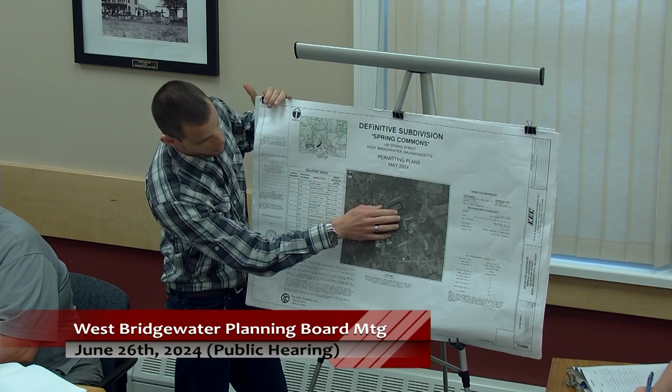This is our preliminary lotting plan that we have come up with. Before, the wetlands was more of a finger type shape; it has expanded a little bit on either side. And per direction from the conservation agent, we're proposing all work outside the 50-foot buffer. By doing that, we are requiring the road to be shifted, almost an S shape, to go around it with the cul-de-sac at the eastern end of the site, similar to the 6-lot layout back in, I believe, 2015. We have a drainage parcel as you enter into the site on the left, and all the lots to the back, with a common septic system area at the front of the site along Spring Street, because that was the only area that was perkable.

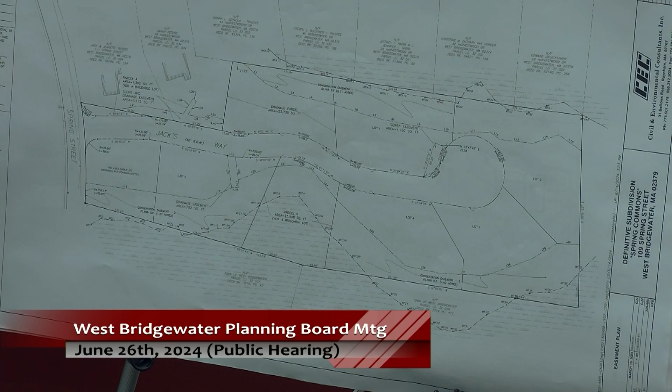Here we have an easement plan, kind of going in tandem with what was done from the previous engineer that conservation is really liking. We're providing a conservation easement. Essentially, it follows the 50-foot buffer line, and this essentially becomes a no-touch area. And so we're going to be working with a wetland scientist to come up with a buffer mitigation restoration plan for this area.

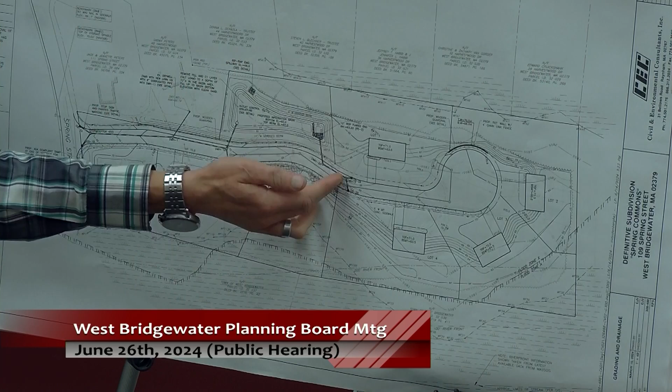And here's our proposed grading and drainage plan. So you come into the site, you have the common septic area to the right, stormwater infiltration basin up to the left, and a cul-de-sac at the end with 5 lots encompassing the entire project. Stormwater generally flows from the cul-de-sac to a low point about halfway down to the road. There's a high point as you go up from Spring Street, which then comes back down to a set of catch basins that flow into the stormwater infiltration basin.

Here's our grading sheet. Typically, the site is going to slope up from Spring Street about, I think it's about 150, 175 feet in, then slope back down to a low spot. There's, like I said, a set of catch basins that will allow stormwater to flow into the infiltration basin. The high point in the middle of the site flows to a set of catch basins at the entrance. So no stormwater flows are flowing into Spring Street uncontrolled. It's all being captured via a set of catch basins at the entrance, then essentially flowing backwards and then off into the wetlands that are on site and then off site to the south.

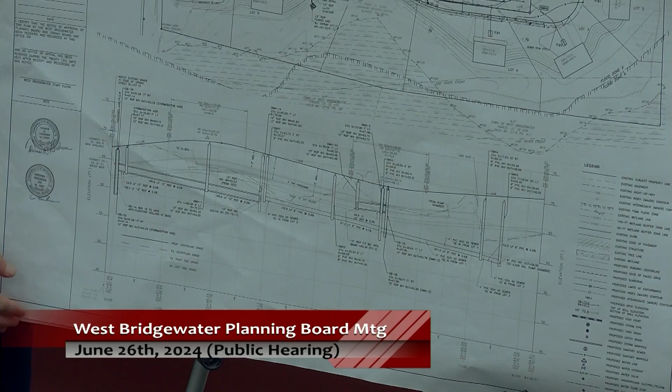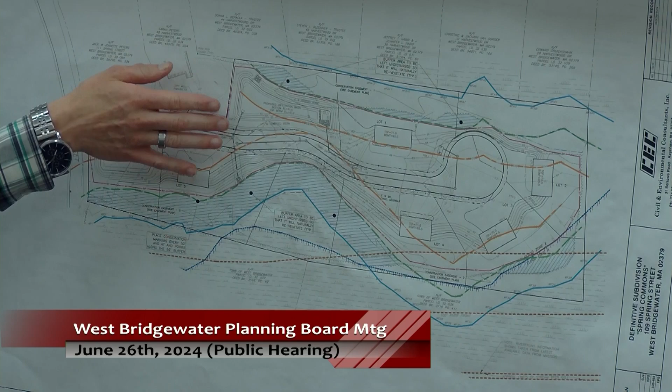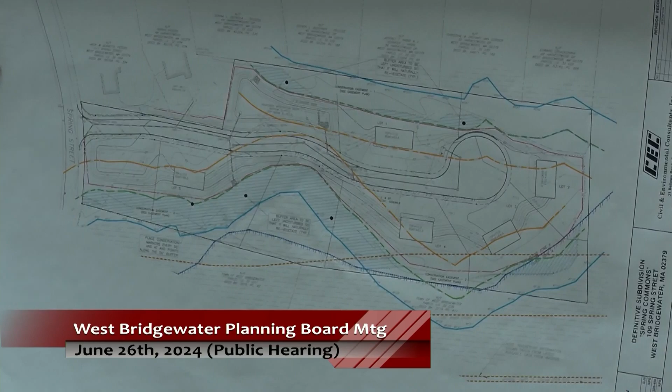And this was a plan that was essentially prepared for the conservation hearing, but it kind of shows the layout of where we're proposing the silt fence, the areas of the 100-foot buffer, and the areas of the 50-foot no-touch. So right now, with this proposed project, no work is being proposed within the 50-foot no-touch. Conservation has asked us to look into restoration mitigation measures within the 50-foot no-touch, and that's currently what we're doing right now, coming up with a plan for that. The rest are just standard details that we have. That is the project in a nutshell. Over to the board if you have any questions.

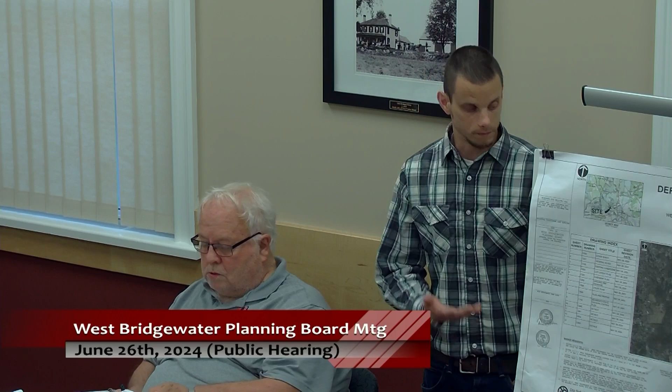Our review engineer came up with comments. Have you addressed all of it? No, we are in the process of reviewing and addressing those. We reviewed it, and it doesn't materially change. I think what they reviewed was still a 5 lot, but it showed work within the 50-foot no-touch. Based on comments from conservation, they wanted us to work outside the 50-foot, so we ended up making modifications. Okay. So we're in the process of working both angles, working with conservation and working with these peer review comments. And the point of tonight was, we're addressing those and then getting comments and questions from the board.

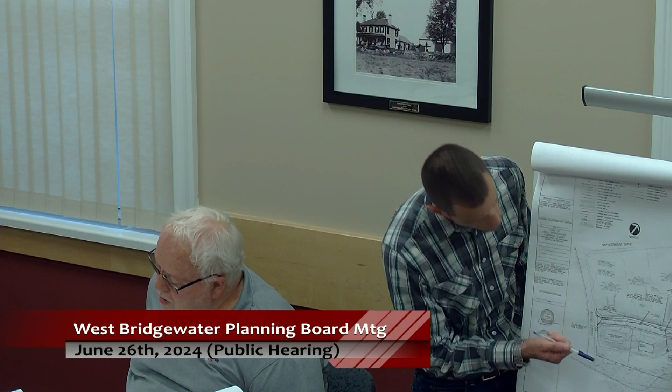Okay. The reason I ask is I haven't seen anything back. Yeah, that was the anticipation, I just wanted to bring it on. I know there were some issues. One of the things we were concerned about last time was around, I think it's Station 4, where you've got the 2-to-1 slope. Have you come up with anything? Yeah, I saw one of the comments was providing a guardrail, and as a matter of fact, I saw that even before I saw the comments, like, oh, that's kind of a steep slope, I'm gonna throw a guardrail there. I read through all the comments, they didn't seem to be materially changing with this new layout. So I am actually showing a guardrail along that 2-to-1 slope there. Where are the hydrants? I think it's on 600 feet.

I'm not that sure. There's one right in front of lot 5. Yeah, okay. I think there was, yeah, only 2 of them. It's under 500. Yeah, it's under 500, I did see that earlier. Did you put one at the end? Yeah, there is, it's so small, very hard to see. But there should be one right in front of, I think it shows test pit 3, between lot 4 and lot 3.

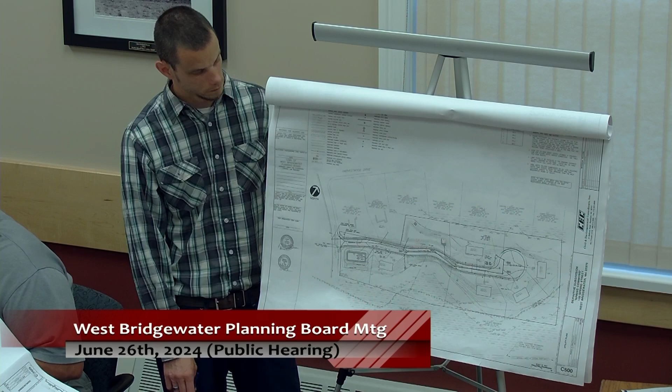Because it shows a little circle, but yeah, it's definitely within 500 feet. That's one thing I absolutely looked into. You put the hydrant right in the front of the house on lot number 5. Yep. That's something that can be certainly moved. I think the spacing right now is like 480 feet, so everything will be moved in tandem.

Nobody wants a hydrant or a telephone pole when they look out, you know. That's very true. Yeah, something that can certainly move. It should be moved to the lot line. Yeah, they should be on the lot line. And I don't see one down at the end.

It looks like you've got a bleeder coming off near the lot line of 4 and 3, kind of zigzagging across to a service. If you look just south of SMH4, there's a little dot that represents the hydrant. That's such a small scale, it's hard to see. But is that line just a service to get to lot 2? Are you looking at the one next to the text that says TP3?

Yeah, that's the service. Okay. Where are the hydrants? What is this? Oh, that's a water service coming to serve this lot. It's going to cut across the street like that? Yeah. Right now it's just dead in the water. Dead. Okay, but that's the same thing.

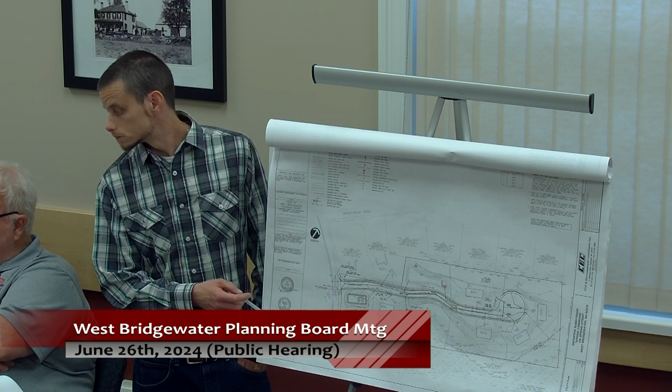You should locate the house and driveway. I'm not sure just where it is over there, but just to show it. I think it's further up. Is the house further up? Yeah, it's more up, opposite the end of Harvestwood. Okay. So south of it, it's just woods there, okay.

Go ahead. I walked that sidewalk for 6 years, I know it. All of high school. Uphill both ways. Yeah, me too.

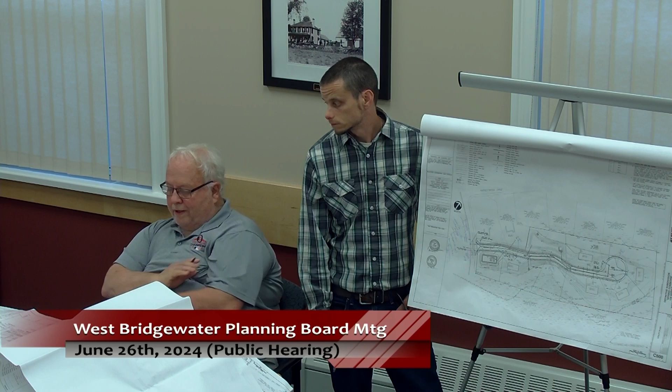Maybe you can work that in. You said you had a wetland scientist looking at the plantings. Yep. Maybe you could incorporate something. And it'll be plantings that aren't gonna take 25 years to grow, something that's gonna be put up and exist. Yeah, that will keep the top through. Yes.

This was on the 88 vertical datum. I believe NAVD. Yeah, well, I saw one of the waivers with 29 to 88, which I think last time around we said, yeah, that makes sense, because the FEMA flood mapping is on 88. Yep. Is there a FEMA elevation for the 100-year floodplain? Or is that just taken from their maps? The only reason I'm asking is because it goes over several different contours, and the 100-year floodplain would be consistent with some elevation. Yeah, it's just listed as Zone A. I don't think it has an elevation associated with it last I checked. I believe it did. Yeah.

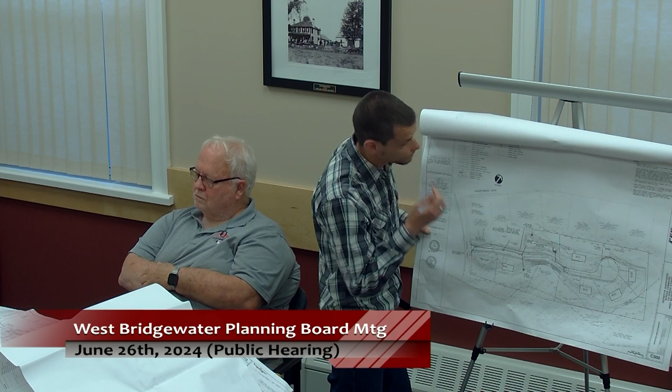Yeah, so you're right here. Okay, so I have a lot of wetland back there, and this past winter, it went straight into his property, pretty far back. I took pictures of it. Yep. And my concern is that with the wetland behind my house, it's gonna rise that much more, and the water table will come up that much more from my house.

So, I mean, the way it's been designed, that's the whole point of the infiltration basin, for stormwater mitigation. We have a stormwater report that shows stormwater flowing to this wetland area, and stormwater flowing to this wetland area. As part of the stormwater management standards for Massachusetts, you have X amount of rate or volume going to this pocket of wetland, and that was analyzed.

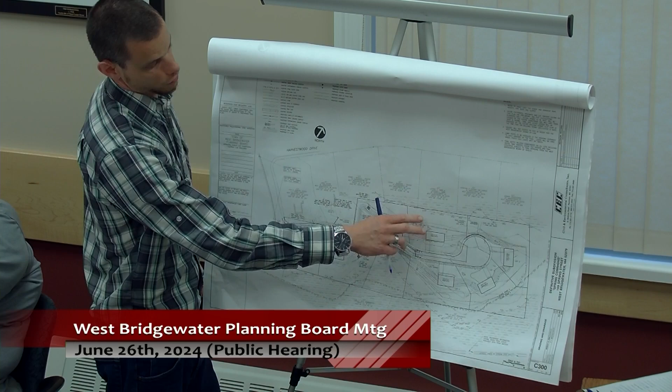So with this layout, with the grading we have shown, and the assumptions that we made, there is less runoff going to this area of wetland and this area of wetland, and that's what our stormwater report shows. In theory, it's not going to change the water table. It says that there's going to be less runoff from this development going to these two areas of wetlands, and these are our design plans, and that's what it shows. But we don't look at what it does to the groundwater table. I can't speak to that.

Well, and that's my big concern, is the groundwater table will go up. And that could affect my basement, because that house is built right behind my house. And like I said, that water has gone directly into his property. And where the rocks are behind my house and his property, they came right up to there. So that's just a real concern of mine.

Did you bring that up at the conservation hearing? We didn't go. It was brought up, but they were deferring to wait to hear back from you. So, yeah. Kicking the can down the road, okay. But

that's one of the reasons we have a consulting engineer review all of this, and he'll be made aware of it and look into it. In fact, the same engineer reviews it for the Conservation Commission too, and it has worked out very well. He's a very qualified engineer, and he doesn't do any work in town. All he does is review stuff, so there's never a conflict of interest. But this will be brought to his attention, and we'll have him review it too.

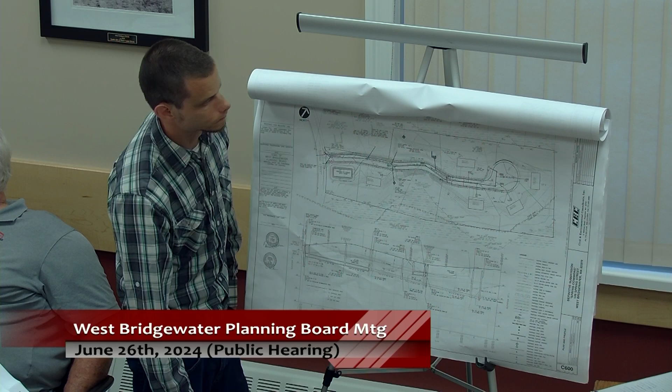Yeah, I can tell you, this was certainly wet when we went out there. It's wet right now. You can come to my house. I bet it is. No, it's gonna be a pool in 3 hours.

So, Christine Gorman, I live at 32 Harvestwood Drive. Yep, you know exactly who I am. So a couple of questions. One, was the stormwater report redone for the new configuration? Yep. Okay, can you publish that, because that was not made available to any of us? Yep, and that's what we're working with as part of this round.

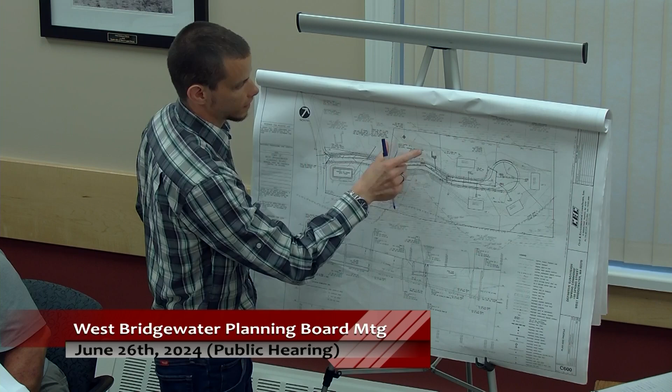So the point of tonight's meeting was to essentially show the board that the older plan essentially worked, and to recreate that same plan here. Instead of the low spot there, where stormwater was going to flow, now it's going to flow to this low spot. It's the same size as the previous design. Correct. And as you were saying, providing you that stormwater report, yes, made public as the next round of revisions comes about.

So I assume that the soil configuration for both that new infiltration area and that back lot are not exactly the same. No, and that's one thing that we looked into, if you have better material here or there. We absolutely looked into where the groundwater table was, and adjusted our design based on that.

And obviously the big thing was this was easier to outlet, because clearly you're going to outlet here. Luckily it worked out where there is no outletting to Harvestwood here. It's outletting to the adjacent wetland, which is more offset where there are fewer abutters. So that was the key thing that I wanted to look into. But yes, that can be done.

However, naturally, by the topography of your plans, it will inlet into the brook that's there on the wetlands, on our side. It might be connected. On the Harvestwood side? On this side here? Yeah, because the topography of that new infiltration field slopes down. So by the very nature of the way water runs, it will run down towards the wetlands. So the way this is, I think it's kind of like a big depression here.

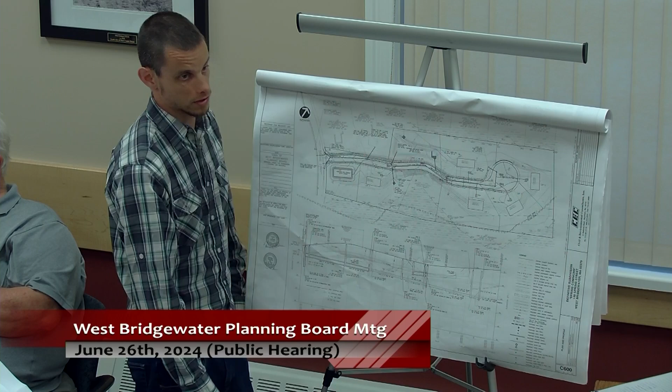But that berm doesn't currently exist, does it? No. So you're going to build that berm, so naturally the water is going to flow back into the wetland behind our house. Yes. Correct. Which will raise it much greater. But according to the water regulations that are controlled by conservation, he's not going to be able to do that. Conservation has not taken a deep enough look into where the water now is going. And you need to jump on top of them, because they took that away from us about 3 years ago. Oh, I do. Don't you worry.

Our basic control is how the water on the impervious, where it is on the surface and where it goes from the surface. Anything on the lots and anything like that is controlled by conservation. So you need to get on their case, because we used to have a say into it. I mean, we can make recommendations, but they are the ones that can say yes or no. But you're not supposed to control water. You're not supposed to create any more hazard on the abutter's property. Is the simple solution. So he's got to make that water that's coming from your direction go south.

Chris, on that infiltration basin we're talking about, you've got an outlet structure, and you say outlet control structure, see detail, and you don't have an invert elevation on it. What is it, where is the detail and what is the elevation? Let's see. That should be on C800. Should that be revised? Should have revised that. Yeah. Okay. Yep, so C800. Okay. And which one is it? Should be down to the right.

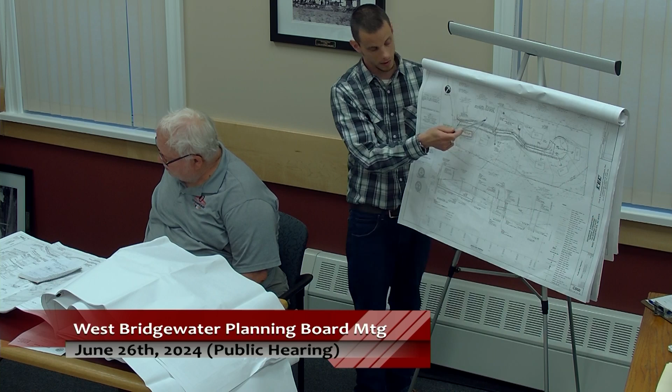So if that's 64 and the overflow is at 66, before that infiltration basin fills up and tops it and goes over towards Harvestwood, will it start coming across and going to the southerly side? We talked about, yeah, so this is the primary outlet. This is just an emergency overflow. The way this is modeled in a HydroCAD model, this is the primary outlet with the outlet at elevation 64. I think the peak elevation in the 100-year storm was 65.9, I believe. So it never in the 100-year storm gets to actual elevation 66.

The emergency spillway was put there in case there's a failure at the outlet control structure. That would have somewhere to go. And there is no opportunity for it to go into or towards the roadway, because the roadway is built up in that area. That's why I have the emergency spillway on the opposite side. So going into the structure, it'd be at elevation 65, right? Yeah, that's where water starts entering in, and then on the back side, it's actually exiting the structure at elevation 64. And when you're modeling it, you've demonstrated that this is all in there, because I know it's about that thick, I haven't looked through it. Yeah. It is all modeled in there. Okay.

There was some concern in engineering about the retaining wall that'll be at the end of the cul-de-sac on lot 2. Yeah, we're working with the structural engineer for that design. Okay, so that's still in progress. Yep. And as we were talking earlier about the guardrails, that'll have to be incorporated. Yep.

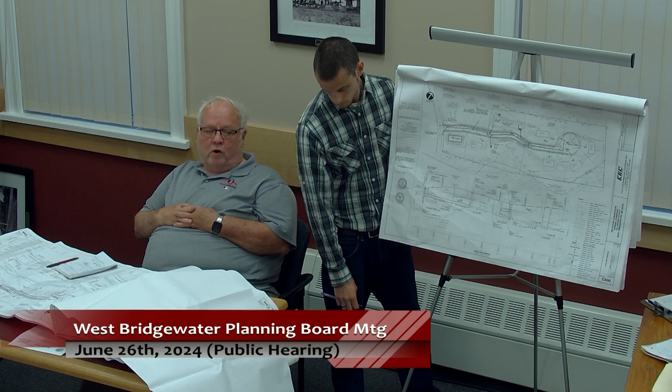And until the street is accepted, it won't be plowed by the town anyway, so it'll be a private contractor paid for either by the developer or the homeowners association. And who is gonna inspect if it's plowed correctly or everything is done correctly? The DPW director. Well, no, you mean if it's a private road? Right.

That's one of the reasons we don't like seeing this, because if it's a homeowners association and you're not taking care of it, all of a sudden you got 6 houses here, 5 of them are going to call up and say that the other one isn't doing what he should be doing. That's why, if you're going to have a house, you want to be the same as every other homeowner. You want to have all the rights of every other homeowner.

That's one of the reasons we advocate accepting the roads, because then the town can take care of it, and they can make it work, and they will take care of it. As you can tell, they do a very good job in West Bridgewater. You go to some of the other towns and you know the difference. No, I agree. They do a wonderful job.

Even though one of them is sitting there, I'm not playing their hand, but he does not do a good job. Listen, you're not talking about me. There's an exception. There is an exception to every rule.

I have a question for you guys, though. Why wasn't Conservation invited to this meeting? I mean, you could see our concern about this and how important it is to Harvestwood. Okay. There are different things. We have a certain amount of authority. Basically, the planning board is to ensure that there is adequate access for vehicles and walking and utilities.

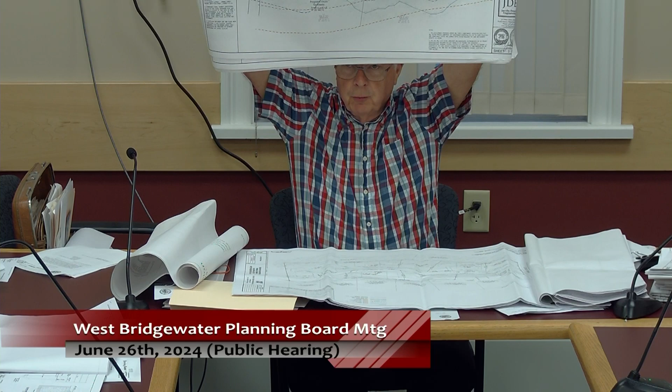There it is right there. This is what was approved. So are any of those concerns relevant? What was the concern from 6 to 3? I believe conservation also approved 6. There was an order of conditions that was issued. Yeah, but this is what was approved. Here's the signatures right on it. This was done in 2018, 6 years ago. But this never went forth.

That's the 3-lot plan? That's the 3-lot subdivision. And that was approved by both the planning and the conservation? Yes, I believe they did approve it also. But my understanding, the plans that were in at that time, we weren't comfortable with, and it came down to this. Different engineers have worked on it, and after we expressed our concerns, this is what he came up with, and we approved it. Basically, it was never accepted.

Was there a community septic on that? I don't believe so. Or was that individual? I would think it was. Yeah, still the community septic was in the same spot. Okay. I don't know why we went down to 3. It was something that couldn't work. I heard it was the applicant's thing. Why reinvent the wheel? Why would I propose 5 or 6 when you guys approved it? So maybe marketability of those lots.

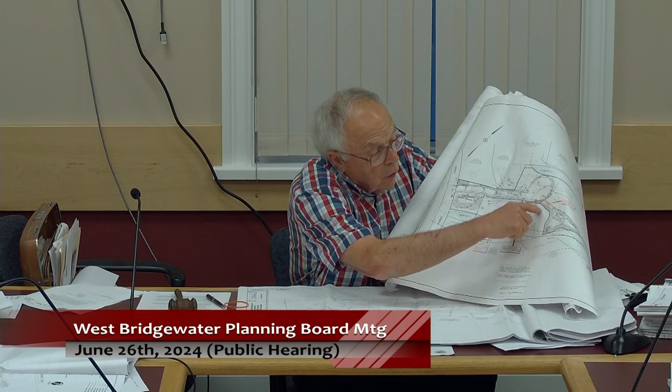And what causes that to grow? Will it get bigger? It's called beaver. The beavers behind Bobby's house have plugged up the swamp. But to be fair, the wetlands grew on the Harvestwood side as well, because we had it delineated, everything backing up from going under the road on North Main Street. So an influx of water can always fluctuate the wetlands, which is why they do the 50-foot buffer in hopes that it won't happen. It does, because we built our house on wetland previously. It does happen.

Back to the 3-lot subdivision. That refreshed my memory. I don't think it was us. I think it was a matter of cost feasibility for the developer at the time. Because when it extended out this far with a retaining wall here, somebody decided it was cost prohibitive, and they went to the 3 lots. So I don't think it was anything we decided.

Yeah, I can't remember. When was that signed, did you say? 6 years ago. And that was exactly what I designed, the methodology. I didn't want to show something that wasn't approved. August, was it? December. It was a Christmas present, we wanted to get rid of it for Christmas.

And also, the new water regulations weren't effective in 2018. They only came in 4 years ago, 3 years ago? So they wouldn't have been affected. Things were looked at differently. I mean, we looked at the whole site, and now we only look at the roadway. That thing, you're looking at stormwater as well.

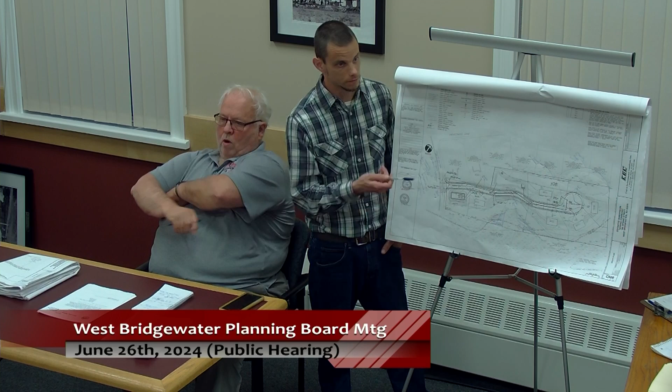And when do you expect to have the wetland restoration report? We are working on that. Obviously, conservation won't approve any plan until we get that before them and they take a look at it. That's one of the things our office doesn't do, also the structural design of the wall. So we are working on a restoration mitigation plan for the 50-foot buffer. I can't give you the timeline, but we are working on that. Okay.

What is your time frame for getting the changes made and getting something back from Mr. Brown? Probably the next meeting. The anticipation was this kind of layout change. We got the peer review comments back, took a look at those, and the point of this meeting was to say we're going to be addressing them, get feedback from abutters and the board, and then get a revised set of plans and all the applicable documents back to you for the next meeting.

We don't meet again till the 17th. You're meeting the 16th with ConCom, you said? Yeah. What else have we got on the 17th, Donna? I don't know that we've got much. This is July 17th. Okay. Henry Street, I believe. Manley Street's the 7th of August. The 7th, okay.

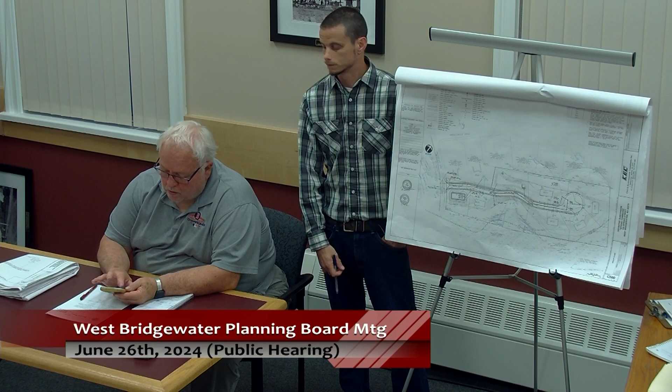We haven't got any comments back yet from them. We're just trying to come up with... we're going to have to continue the public hearing so that everybody here knows, because there will not be another public notice in the newspaper, so we want to make sure everybody knows when you leave. Can you have it by then? We have 5 Wednesdays, so August the 7th, we know we're getting busy. So do you think you can get your

By August 7th or the July 17th? By the 17th, because August the 7th, that'd be our next meeting after the 17th. Well, that's another public hearing, but those aren't that complicated. We could do both. Yeah, anticipating July 17th. You want to go do 17th? Yeah. Okay.

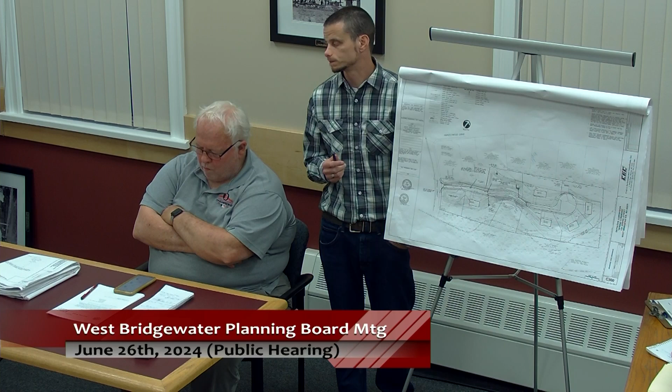So this meeting will be continued to July 17th, and we'll be meeting at 7:30. This was an off night, we could meet earlier, because there's another board that meets before us. So the public hearing will be continued to July 17th at 7:30. Thank you everybody for coming in.